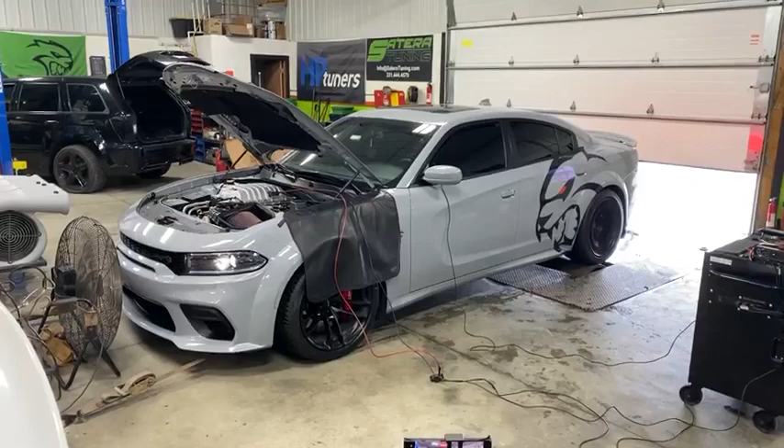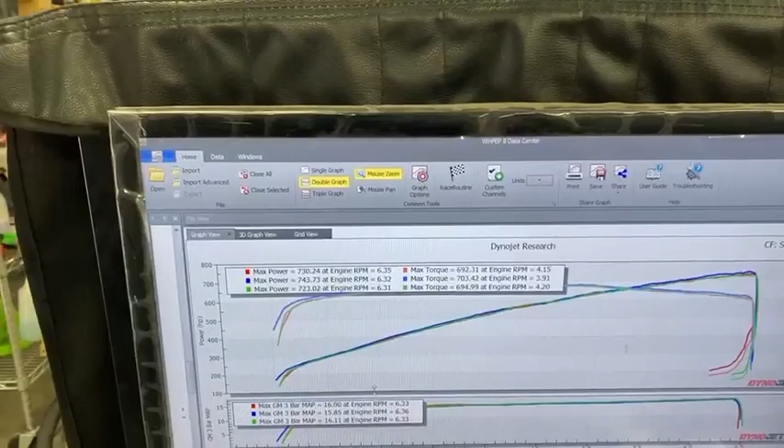What she did. This is untuned, just with a catback.

Alright, so what we're doing here is discuss where this came out for the catback install. This is the Borla ATAK, and everybody likes to discuss: is it beneficial, does it gain power, is there a reason to do it? So anytime we have an opportunity, we do it. So this car is delivered as a bone stock '22 Charger Redeye. All we did was take the factory catback off and throw it on. And we do two controlled pulls.

One, we start about 180 degrees on coolant temp, no chiller. What I have now is I turn the chiller on and let it idle, get up to about 205 degrees, and then do another pull. So that's what we have here. So the first pull here was the controlled one, so it's apples to apples. So red is equal to green.

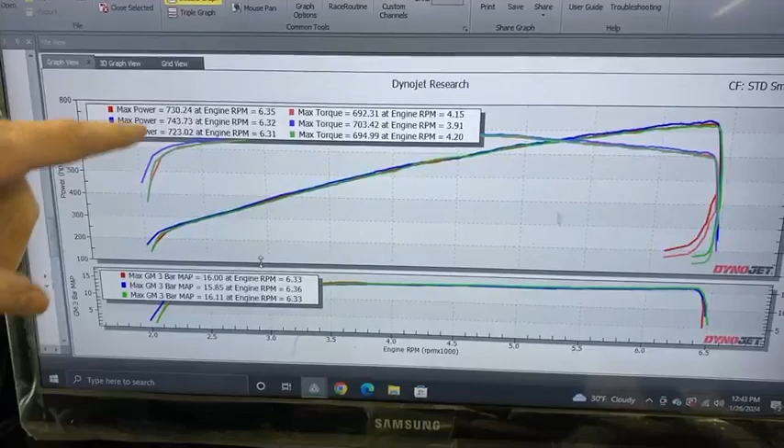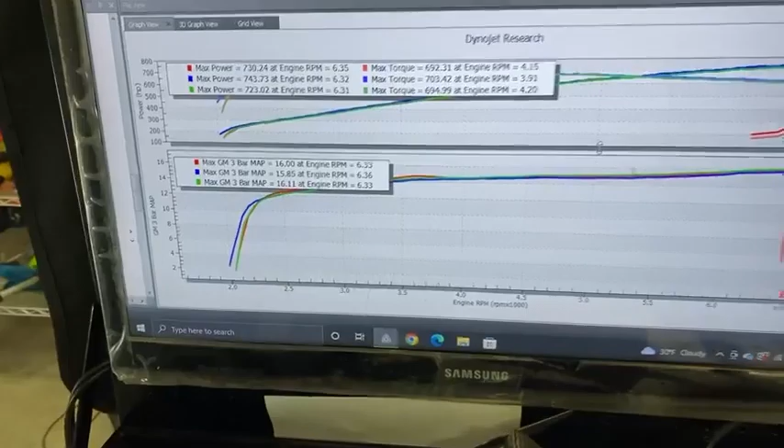Next up, in about 2 minutes, I'm going to do it with the chiller running for a few minutes and at full temp. So you can see already we lost a little bit of horsepower, and we also gained a little bit of torque, very minimal. One thing that's kind of interesting is the green line, very close, it actually made more boost by getting rid of the factory catback and going with the Borla.

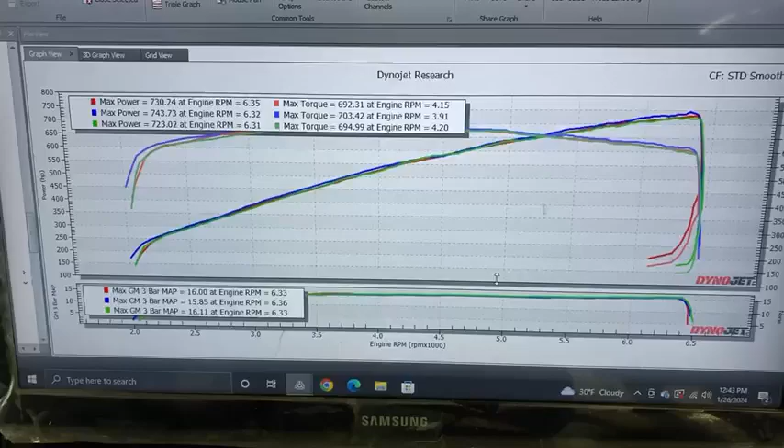So what we're going to see now will be apples to apples, and what I'm going to do is take the highest horsepower from each, stock and then with the catback, and then do a comparison. So, should be good to go. Let me just reset my camera and then we'll be all set.

Take a look. Let's take a look. What we do. Look at that torque number, though. Woo!

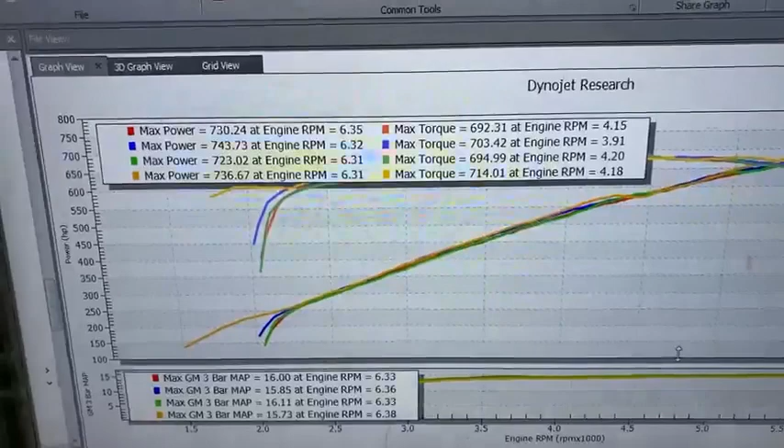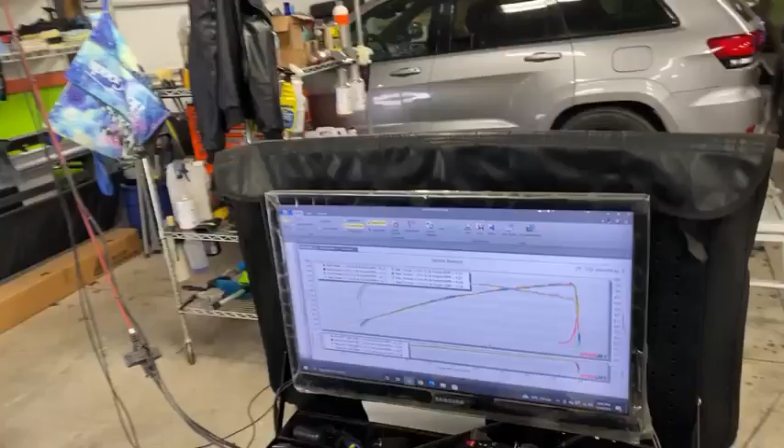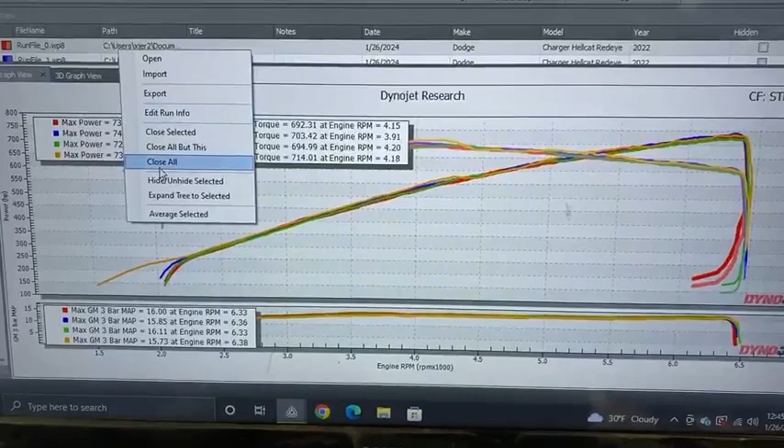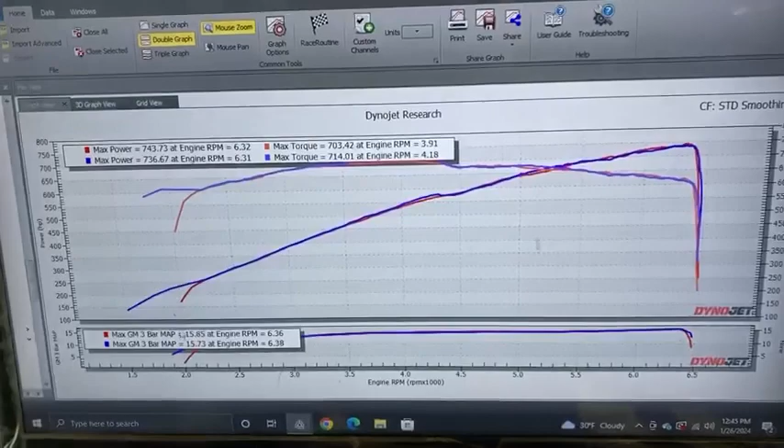All right, so you can probably hear us a little bit better. So again, this is untuned. I am not in this in any way, shape, or form. So it looks like, believe it or not, the heat-soaked one with the chiller in both applications is higher. So what I'm going to do now is we are just going to look at apples to apples. This is as much as you can get in regards to equal. So this is a heat-soaked car with the chiller running, and we can break it down here.

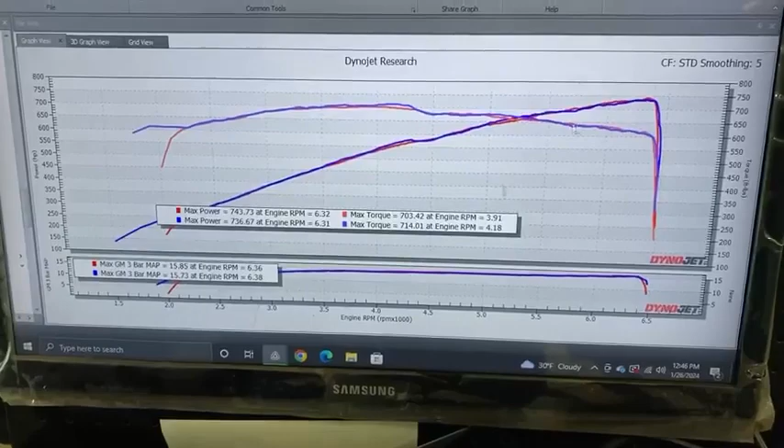So temperatures are almost identical, and you can see it actually started looking like it was going to make a little bit more. As you can see, the peak torque number bumped a little bit, and then what it did is cat over temp kicked in pretty aggressive like you saw before, but reality is that could just be the difference between 1 or 2 dyno pulls. So, anybody out there that wants to argue, here's the boost curve, so you can see.

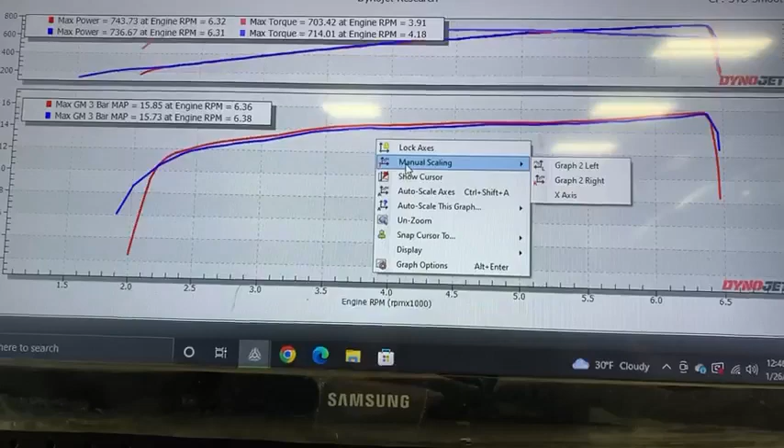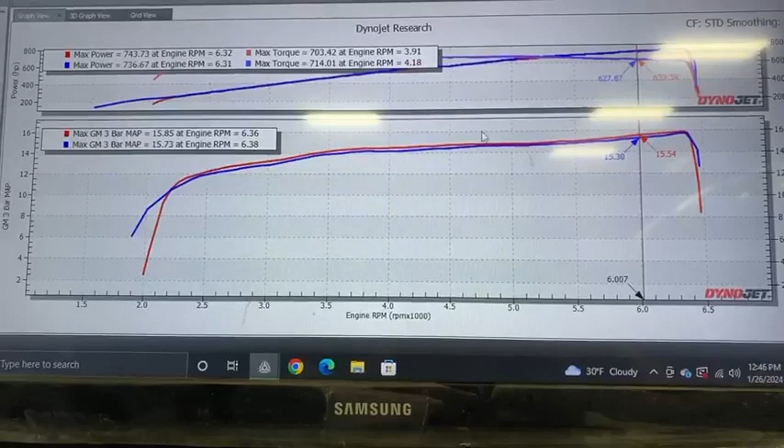So heat soaked, we had about... Remember, red is stock, blue is with the new Borla ATAK. So we did get a little reduction of boost. So about just under ½ pound of boost reduction down low, and then towards the top, we're seeing 0.2, a quarter pound of boost. So it dropped a little bit, not by a lot, but heat soaked. The result is there, as you can see.

Now, I can tell you, on a Redeye like this, if I were to get my tune into it, we're talking easily 40, 50, 60 horsepower, if not more, just by a tune. So maybe it would amplify there. But in the stock application, you can now say that a catback is not going to benefit you in any way, shape, or form. A little torque jump, but again, like I said, that just could be a variance from one dyno pull to the next. So, not really considering that anything great.

It still has the cat over temp, complete stock settings in place. So, like I said, combination, but as you can see, apples to apples. You know, sounds good though. Yeah. Sounds killer.

So let's go ahead and get the shop up. Yeah. I'll get the office ready. All right, let's see where we're at. All right, let's check out. Ayo, Mr. Shop Manager.

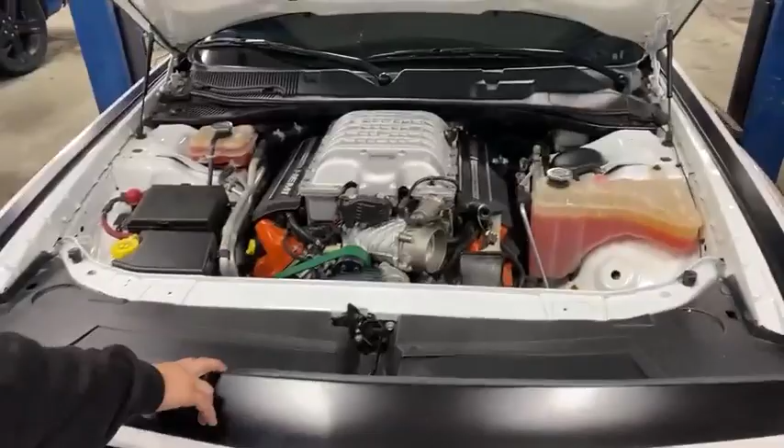Give me a little rundown. What's going on in the shop? This one, we're diagnosing an issue. Had some belt slippage, so figuring out what that is. Okay. Over here, we've got the hub that we're replacing. Freeway, so we got this lifted up, get that ball rolling. Got a couple fun projects. Got an engine build going on over here that's in the lift, so getting that one rolling.

So we stay busy right now. Waiting on some parts, some stuff. You know, just time. Time is the thing. So we're finishing up him. Like he talked about, we're putting a new crank hub on him. His was slightly damaged, so just repair, making sure it's as safe as possible. Waiting on a header for the old Jeep up in the air. After that, it's buttoning her up, tuning, back together.

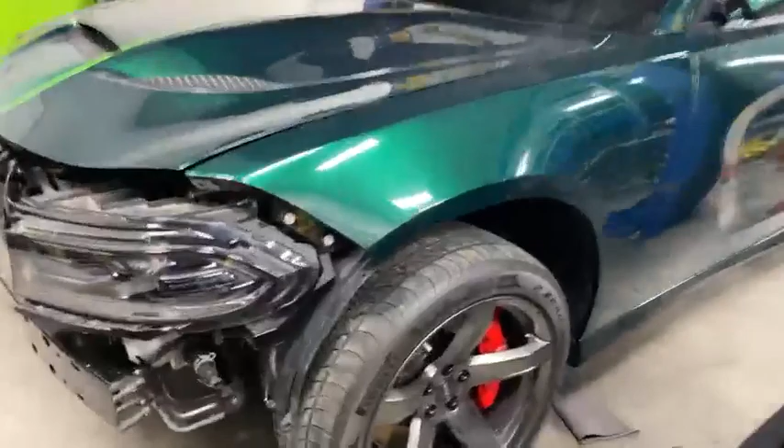An old shop car sitting here with the wheels that I'm trying to buy off of Jeremy. If you know me, you know how badly I want these wheels. So just waiting on more parts to get the shop car back together, and then maybe a little something with that. Let's see where else we are.

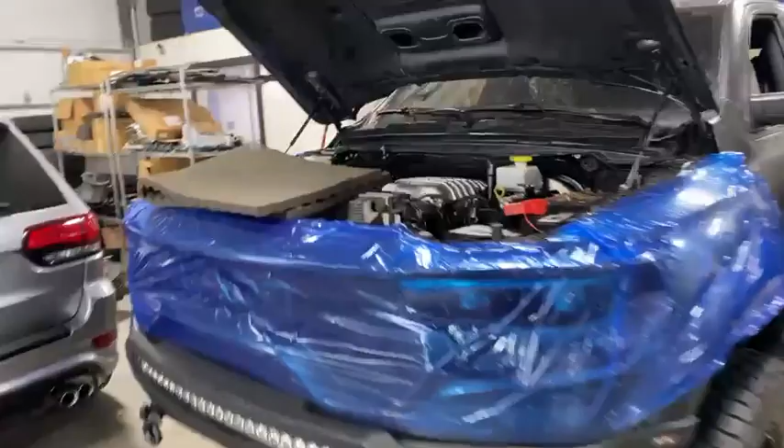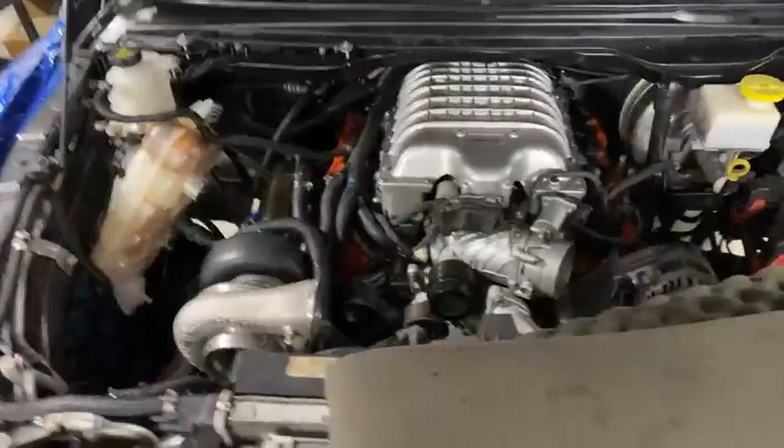Ooh, here's a good one for y'all. Everyone loves turbos. Maybe not everyone, but I sure do. So here's our little TRX. Let's get up there. Let's see what's going on. Woo! Look at that. Isn't that pretty? This is getting finalized. We're progressing on that. This is getting our true flex fuel. So we have been doing that for the past couple of days. The booster pump as well. So this one, a few more finishing touches, then she's ready to get going.

So let's see where Jeremy's at. What's up, nerd? Blake. How rude. All right. Let's see if we can leave it on this time. Yeah. Well, new phone. Sorry about that last time. I did not mean to cut it off. Turbo Hemis are fun. Absolutely, Jeff. You would know of all people. Perfect. Get your notebook. My notebook. Perfect. There we go.